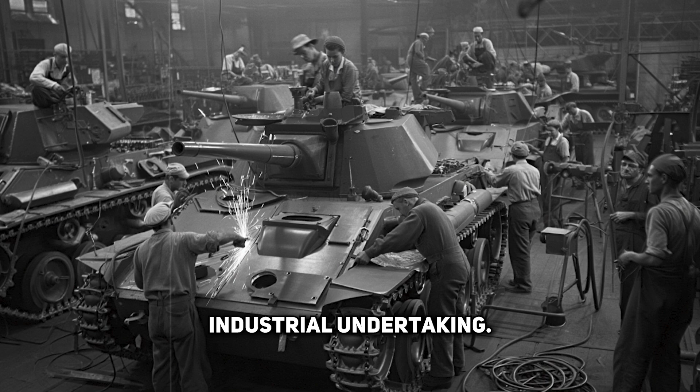On the other end of the line, K.T. Keller, the pragmatic chief executive of the Chrysler Corporation, responded with a characteristic lack of pretense. "I don't know," he admitted. "I've never seen one of these things." This moment of stark honesty, far from being a confession of incapability, was the first step in a revolutionary industrial undertaking. At that precise moment, the military reality was terrifyingly clear.

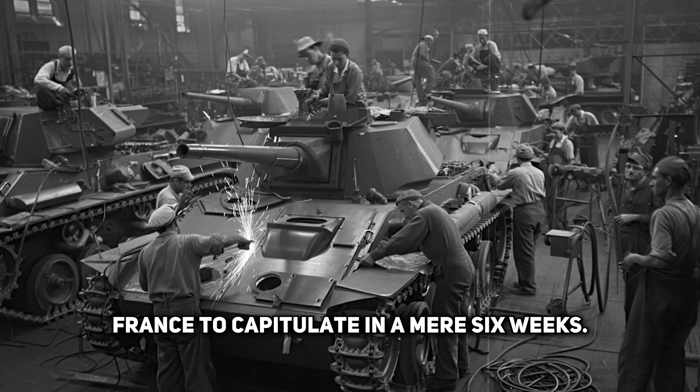The United States Army possessed a mere 66 medium tanks, a force so negligible it could have been annihilated in a single morning by the Nazi war machine. Across the Atlantic, Germany had deployed over 3,000 panzers, perfecting the doctrine of blitzkrieg to shatter Poland in 26 days and force France to capitulate in a mere 6 weeks. The mathematics of defeat were being scrawled across the European continent in fire and blood.

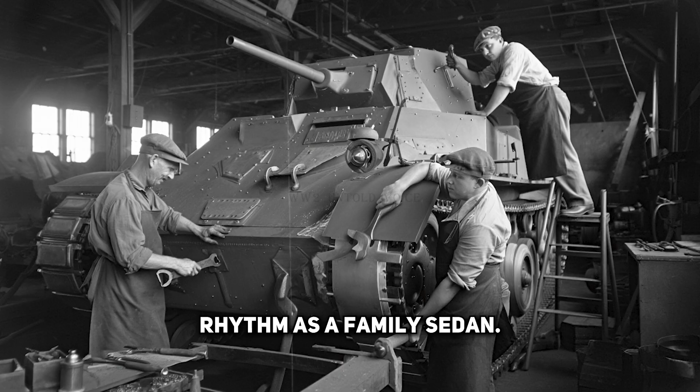Unbeknownst to either Knudsen or Keller, their concise conversation would catalyze the most profound and rapid industrial metamorphosis in the annals of military history. It would set in motion a chain of events that, within a scant 9 months, would see Chrysler accomplish what entrenched military arsenals had deemed unattainable. The tank, a 30-ton behemoth of steel that traditionally required months of painstaking labor by master craftsmen, would be reimagined as a product of the assembly line, rolling forth with the same relentless rhythm as a family sedan. At its peak, a new tank would emerge from the factory every 55 minutes.

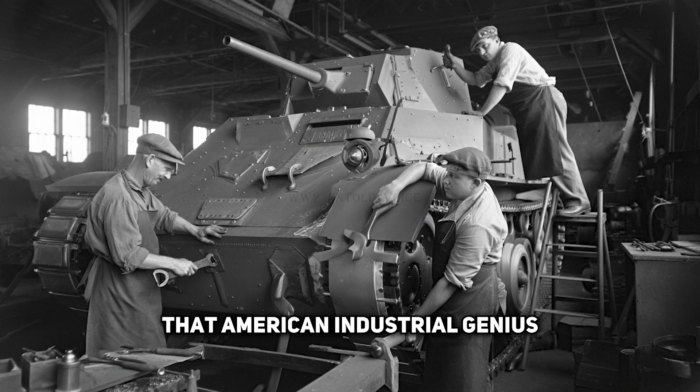This unprecedented process would systematically dismantle every entrenched assumption about military manufacturing, proving conclusively that American industrial genius could weaponize the very concept of mass production. The challenge began with a problem of foundational proportions. In the summer of 1940, the United States ranked a humiliating 19th in global military power, trailing even Portugal. Its army was a force more reminiscent of 1918 than 1940, with more horses in its inventory than tanks.

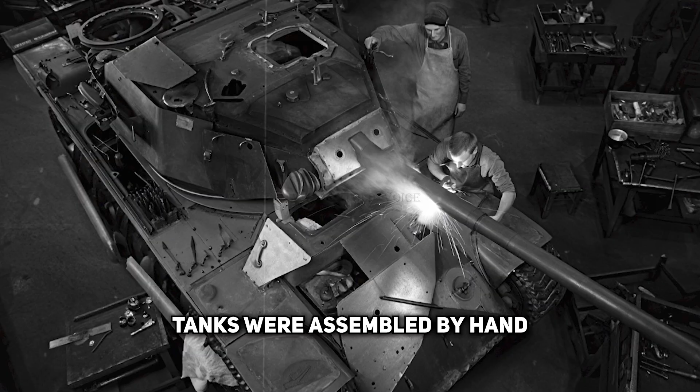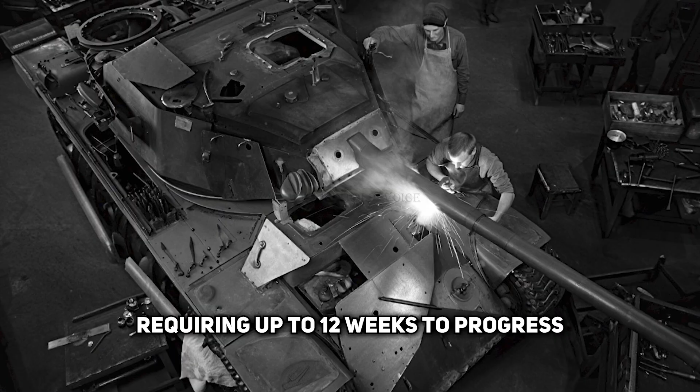The Army Ordnance Department, the entity responsible for the development and procurement of weaponry, operated under production methodologies that had remained fundamentally unchanged since the First World War. Tanks were assembled by hand in government-owned arsenals like Rock Island, Illinois. Each vehicle was a unique creation, a metallic sculpture where components were hand-fitted and adjusted by skilled machinists and armorers. At maximum capacity, Rock Island could produce perhaps 3 medium tanks per month, with each unit requiring up to 12 weeks to progress from raw materials to a battlefield-ready machine.

German panzer production, while more advanced, still relied on similar craft-based principles, albeit supercharged by years of clandestine rearmament. By 1940, German industry was delivering approximately 1,400 tanks annually across multiple specialized factories. Britain, though more mechanized than the US, managed only about 1,000 tanks per year. Every major military power shared a core dogma. Tanks were sophisticated, bespoke weapon systems that demanded the touch of master craftsmen, specialized facilities, and months of meticulous stationary assembly.

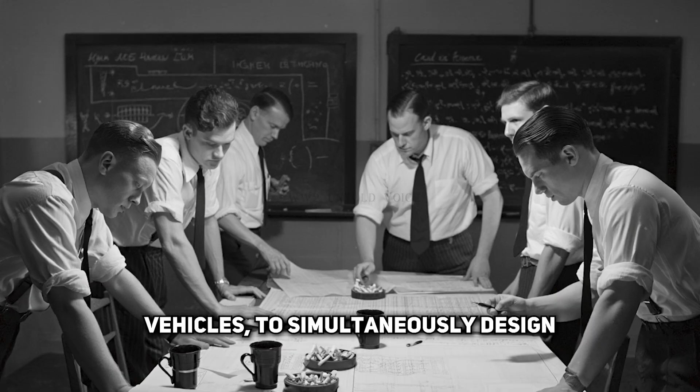Immediately after concluding the call with Knudsen, Keller summoned his most trusted lieutenants, B.E. Hutchinson, his sharp-minded chief engineer, and Fred M. Zeder, Chrysler's vice president of engineering. The trio convened in Keller's office within the hour, facing an impossible proposition. The U.S. Army needed 1,000 medium tanks. It needed them in less than 18 months, and it was asking Chrysler, a company with zero experience in armored vehicles, to simultaneously design the production methods, construct a factory, and deliver the finished goods.

Hutchinson immediately cut to the heart of the logistical nightmare. What's the current production time for a tank? Zeder, having done his homework, delivered the grim statistics. Rock Island produced 3 M2A1 medium tanks monthly, taking 12 weeks per unit with skilled craftsmen hand-fitting every component. Hutchinson performed the quick, devastating calculation. At that rate, fulfilling the Army's order would require 27.7 years.

Keller's response was definitive and would become the program's guiding philosophy. We don't build tanks the Army's way. We build them our way. If they want 1,000 tanks in 18 months, they need to accept automobile production methods, which means we need to see what we're building. Their pilgrimage to the Rock Island arsenal was an education in obsolescence.

They observed workers painstakingly hand-fitting armor plates, adjusting track tension by eye and experience, and custom machining parts to account for wide tolerance variations. The M2A1 medium tank, a 19-ton vehicle armed with a 37mm gun, comprised roughly 8,000 individual parts, all manufactured to loose tolerances that necessitated skilled adjustment during assembly. No two tanks were truly identical. Keller recognized the fundamental impediment immediately.

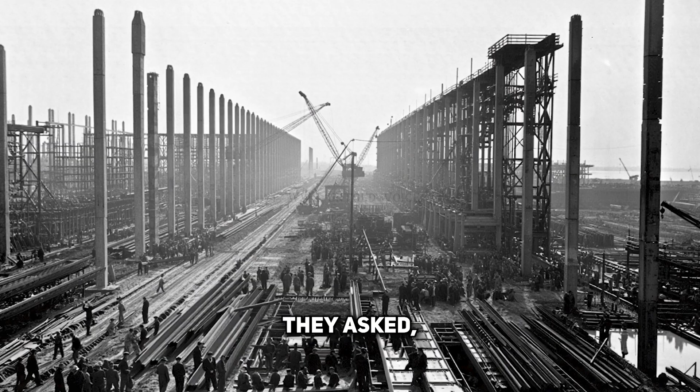Their paradigm-shifting breakthrough came from inverting the core question. Instead of asking, "How can we build tanks faster using established methods?" they asked, "How can we build tanks as if they were automobiles?" Skelton articulated the revolutionary insight.

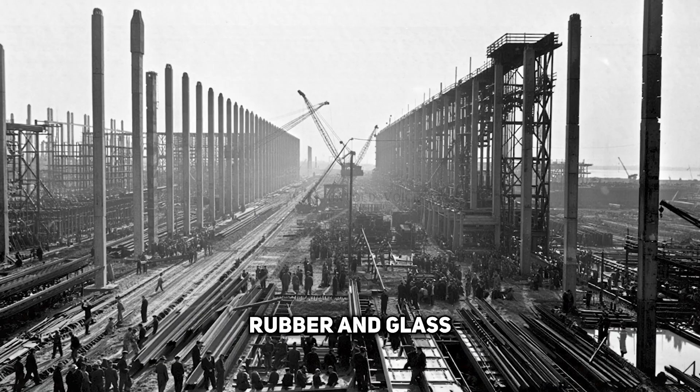An automobile is 2,000 pounds of steel, rubber, and glass assembled from 5,000 parts. We make 3,000 of them per day at Highland Park. A tank is 60,000 pounds of steel assembled from 8,000 parts. The only difference is scale and purpose.

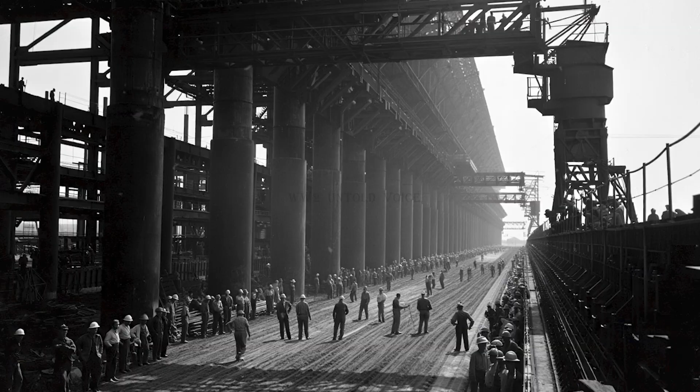This reframing was transformative. If a tank was simply another complex mechanical assembly, then the core principles of automobile production, interchangeable parts, precision manufacturing, and a moving assembly line, could be applied. This required a complete reimagination of tank manufacturing from first principles.

Every component would need to be redesigned for mass production, every assembly sequence re-engineered for a moving line, and every quality control checkpoint shifted from craftsman's intuition to measurable, objective specifications.

The committee's analysis revealed that a staggering 60% of the production time at Rock Island was devoted solely to custom fitting and adjustment. Parts manufactured to military arsenal tolerances varied so widely that assembly became a constant exercise in adaptation. Hutchinson proposed the radical solution. We manufacture every component to automobile tolerances. Then they fit together without adjustment.

To military engineers, this was heresy. Tank components endured stresses far beyond those experienced by automobile parts. Achieving such precision would demand new tooling, new supplier networks, and unprecedented quality control. Yet the potential payoff was astronomical. A process requiring 500 man-hours of assembly could potentially be slashed to 150 man-hours if components simply bolted together.

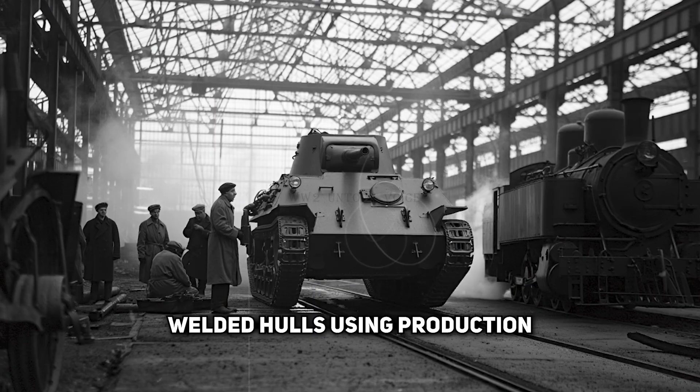By November 1940, the committee had formalized the Chrysler method for tank production. It mandated precision-machined components, standardized and interchangeable armor plates, welded hulls using production jigs instead of rivets, and a final assembly on a moving line with specialized workstations.

Keller's presentation of this method to the Army Ordnance Department was met with profound skepticism, bordering on hostility. Military engineers argued that automotive tolerances were insufficiently robust for combat, that moving assembly lines would compromise quality, and that welded armor was inferior to riveted construction. They dismissed the proposed production rate of 10 tanks per day as pure fantasy.

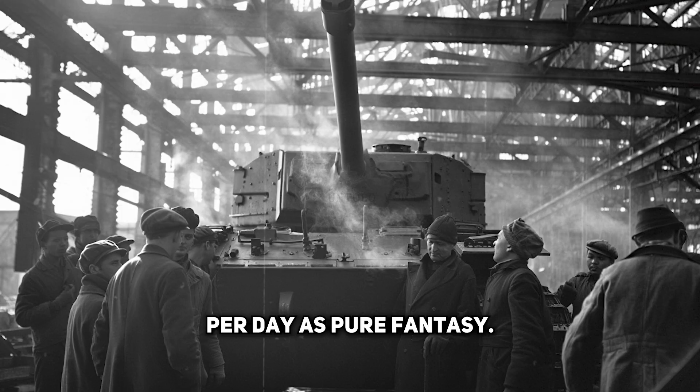Keller, however, possessed one irrefutable argument. "You need 1,000 tanks in 18 months. We can deliver them. Can anyone else?" The Ordnance Department had no answer. In late November 1940, Chrysler received an unprecedented contract. The Army would fund the construction of a purpose-built tank factory, and Chrysler would design, equip, and operate it.

The contract included one crucial stipulation: the facility must be designed by Albert Kahn. Albert Kahn, a 71-year-old German Jewish immigrant, was the visionary architect who had literally shaped the face of American industry. Having never formally attended architecture school, he learned his trade as an apprentice.

By 1940, his firm, Albert Kahn Associates, had designed nearly 1/5 of all architect-designed industrial factories in the United States, including Ford's revolutionary Highland Park and River Rouge complexes. Kahn's genius lay in treating factories not as mere buildings, but as machines for production.

His designs maximized natural light, optimized material flow, and created vast, column-free spaces that allowed for flexible and efficient production layouts. He was a pioneer in using reinforced concrete, which enabled faster construction and larger open floors than traditional steel frames.

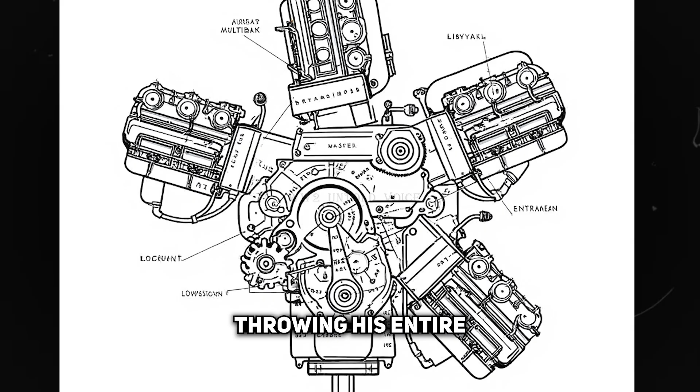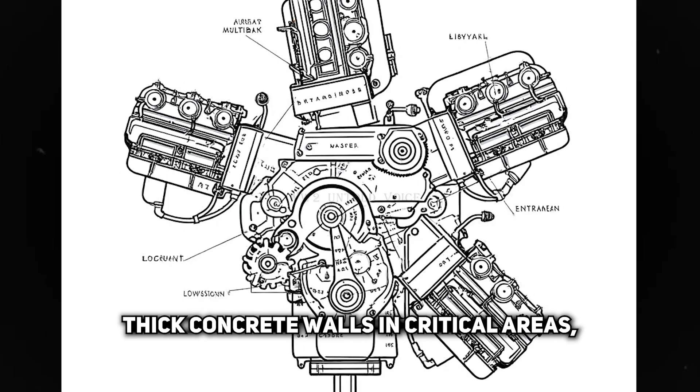The main building would encompass 1.25 million square feet under a single roof, making it one of the largest industrial structures on Earth. Its design featured 3-foot-thick concrete walls in critical areas and a reinforced roof with steel trusses designed to deflect bomb blasts. Kahn's layout was the physical embodiment of the Chrysler method.

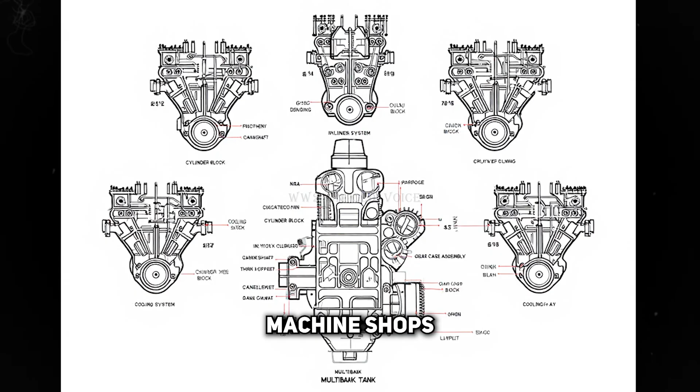A main assembly line would run a quarter-mile through the building's length. Feeder lines would deliver major components to the main line at precise intervals. Machine shops for drivetrain components occupied the northern sections, while welding bays for hulls and turrets filled the southern wings. The entire facility was designed for a linear material flow, with raw steel entering at the west end and finished tanks rolling out the east.

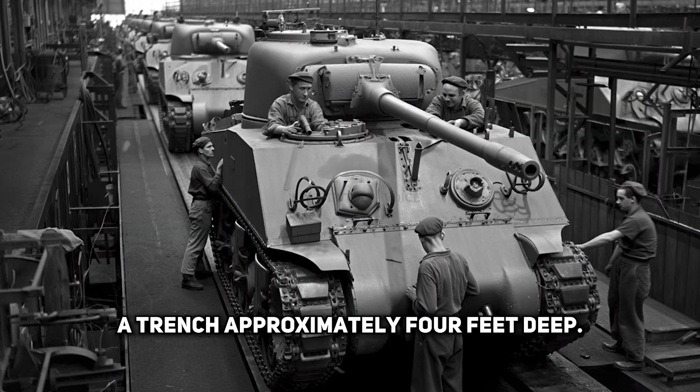One of Kahn's most ingenious innovations was a sunken assembly line, a trench approximately 4 feet deep. This allowed tanks to be carried along at a height where workers could easily access their undersides for suspension and drivetrain installation without the need for jacks or pits, saving hundreds of hours per vehicle.

Groundbreaking occurred on September 9, 1940, on 113 acres of farmland in Warren Township, Michigan. The ensuing construction was a frenzy of coordinated activity, a race against time enabled by Kahn's use of reinforced concrete, which cured rapidly.

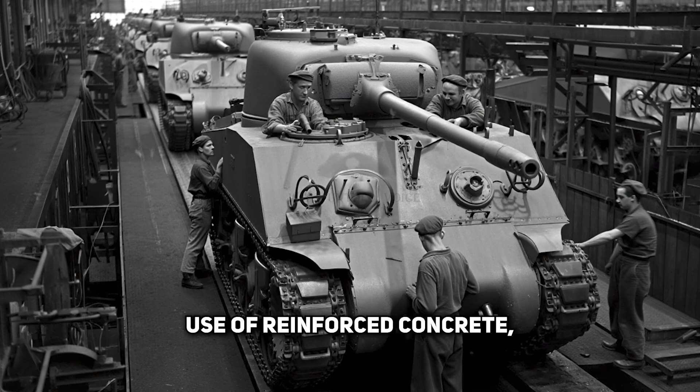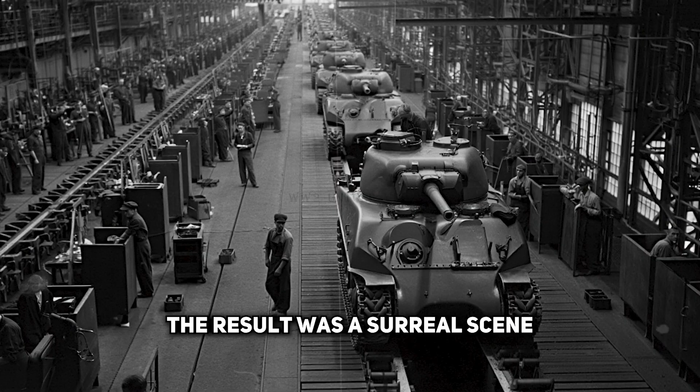By February 1941, the main building was structurally complete, but remained a hollow shell, lacking windows, heat, and finished interiors. Undeterred, Keller made a legendary decision. They would begin building tanks inside the unfinished factory. The result was a surreal scene of industrial determination.

That winter, workers assembled the first tanks in frigid conditions, their breath visible in the air, warmed only by the improvised solution of a steam locomotive parked inside the building, its boiler providing makeshift heat. This was not careful planning. It was industrial will made manifest.

Concurrently, the tank committee was solving a cascade of technical challenges. The M2A1's transmission, designed for hand assembly, was redesigned as a modular unit, slashing its assembly time from 40 hours to 4. The suspension was standardized, with complete bogies pre-assembled in 2 hours and bolted to the hull in 20 minutes. The most contentious issue was the hull.

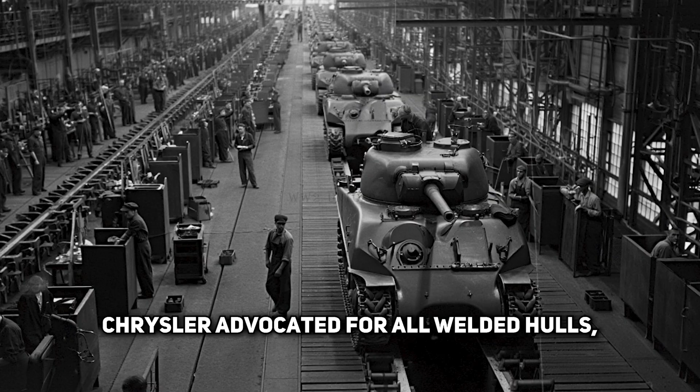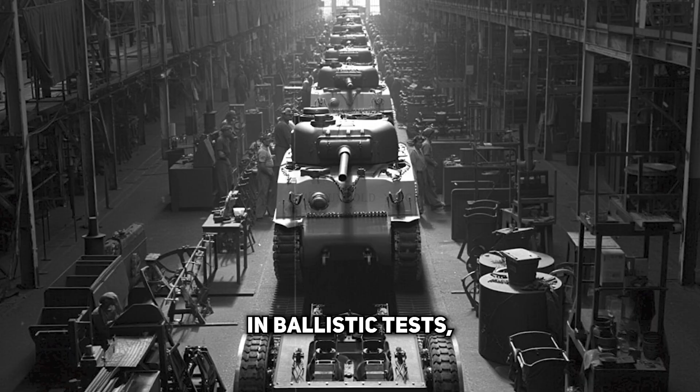The Army insisted on riveted construction, the proven method. Chrysler advocated for all-welded hulls, arguing they were stronger and faster to produce. The company systematically countered every objection, producing test welds that proved superior in ballistic tests, developing heat treatment processes to eliminate stress, and demonstrating that semi-skilled workers could produce perfect welds using production jigs after just 2 weeks of training.

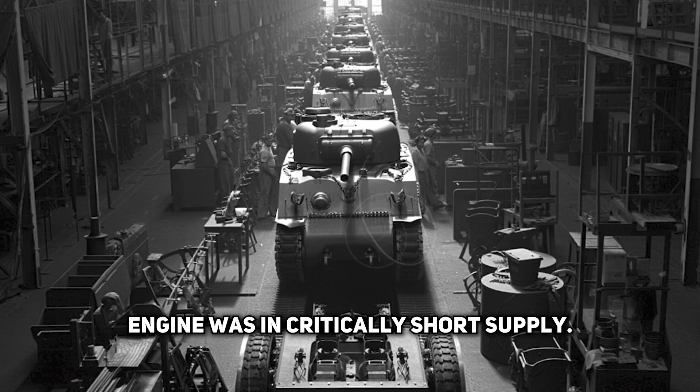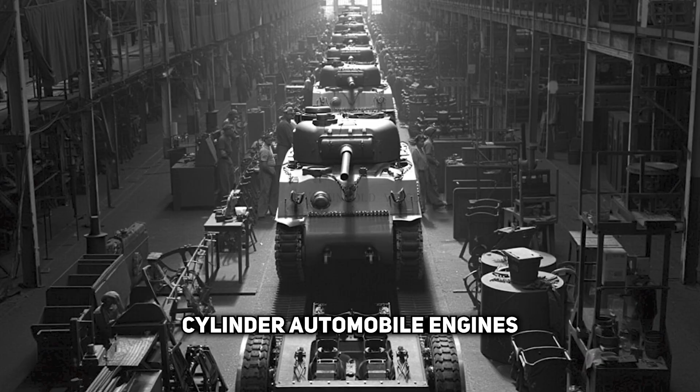The engine dilemma required particularly creative problem-solving. The preferred Continental R975 radial aircraft engine was in critically short supply. Chrysler engineer Harry Woolson proposed an audacious alternative, combining 5 of Chrysler's standard inline 6-cylinder automobile engines into a single, monstrous power plant. The resulting A57 multibank engine was a Rube Goldberg-esque marvel of complexity, 30 cylinders arranged around a central gear case, producing 425 horsepower.

The Army hated its complexity, but they could not argue with its practicality. It used existing tooling and components and could be put into immediate production by semi-skilled labor.

On April 12, 1941, one day before Easter, the first Chrysler-built M3 medium tank was completed inside the still unfinished, freezing factory. The M3 was an evolutionary design, already obsolescent, with its main 75mm gun mounted in a hull sponson. But it was historic, the first tank ever produced on an automobile-style assembly line.

At its formal unveiling on April 24th, Keller rode in the tank as it emerged into the spring sunshine, demonstrating its capabilities to a crowd of skeptical military officials by crushing obstacles and firing its guns. What followed was a relentless ramp-up of production. By May, a tank was completed every other day. By June, it was 1 per day.

By July, 2. The attack on Pearl Harbor on December 7, 1941, transformed the endeavor from an urgent project into a national imperative. The Army's requirements exploded. Chrysler responded by accelerating the pace further. The key to this scaling was the development of a vast supplier network, orchestrated by B.E. Hutchinson. He enlisted over 400 companies across 32 states, providing them with technical assistance and guaranteed contracts to produce everything from final drive housings to track pins.